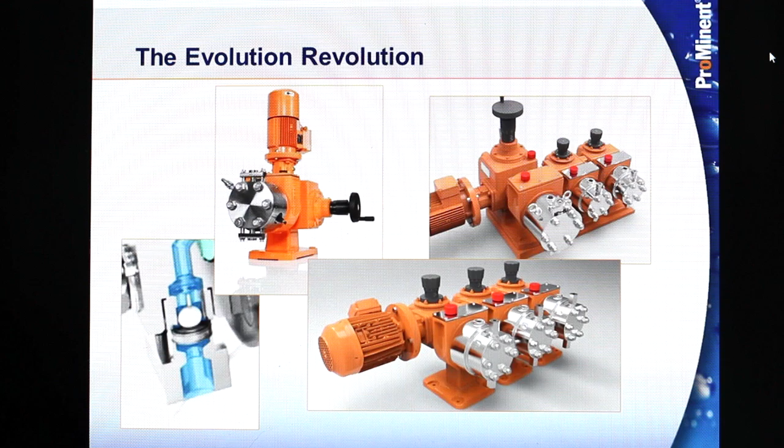So what is the Evolution Series pump? The Evolution Series pump is designed around the API 675 specification. API 675 is specific to chemical metering pumps, or positive displacement chemical dosing pumps. It is the American Petroleum Institute standard that everybody tends to build their pumps to. So it meets a high level of industrial standard.

It is one of those specifications that a lot of manufacturers will take some general basic exceptions to, but for the most part, you've got a general guideline as to how you need to design that pump. We are compliant with the Evolution pump to the third edition, the most recent edition of API 675.

It is a hydraulically actuated diaphragm pump, meaning that it has hydraulics driving the diaphragm, and consequently that pump can do extremely high pressures. It's capable of up to 5,800 psi, as you can see below. So it's capable of very high-end process type projects and applications.

It is a non-lost motion drive, which means it is a design that meets certain applications and certain standard specs for various clients, lends itself to the higher flow applications, becomes a very robust drive. These drives are not always the least expensive in the world. You won't find it in the very small pumps usually, but you'll see it in the higher end pumps where you need a much higher flow, much higher pressure applications.

The Evolution was designed to run in flow ranges starting at about 1 gallon an hour and up to 1,800 gallons an hour. It's able to do that through 4 frame sizes. Depending on the application, we can tailor in an application of a single pump selection if we need to. Again, those pressures on those applications will go up to 5,800 psi in some of the lower flow applications for some of these services.

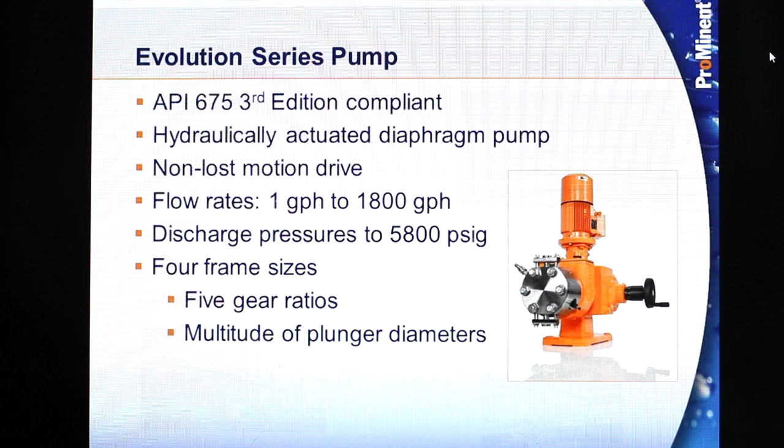The Evolution pump was designed to go after a broad spectrum of markets. Normally when we talk about API 675 pumps, American Petroleum Institute, we're thinking about chemical and petrochemical, hydrocarbon processing, the higher end process applications, which is exactly what this pump is designed for.

What a lot of folks don't think about right off the top is other services where this pump's going to fit in. The power industry, for example. The United States is currently on a process of replacing a lot of old coal-fired power plants, so there's a lot of new gas-fired plants being installed in the U.S. Because of that, there's a lot of new applications, and those chemical feed applications can be relatively high pressure. So the Evolution does fit into a lot of those services very well.

The oil and gas industry, even though it is not exactly doing the best right now because of low oil prices, the business is still there. We know from past experience that the oil industry always has a cyclic effect. It will come back up at some point in time, and with this product, you'll actually have a piece of equipment that will fit it very well, including offshore applications for those customers that are in the Gulf Coast, or anybody dealing with an engineering firm that might be doing a project overseas for an offshore application.

The ones that don't always come to mind are the water and wastewater treatment applications. Even municipal type plants periodically will specify a hydraulically actuated diaphragm pump. They don't need it for the pressure, usually. Most of those plants are 150 pounds discharge pressure at the most. But they have an engineer that has specified a product that says it needs to be a hydraulically actuated diaphragm pump. The Evolution fits those services very well.

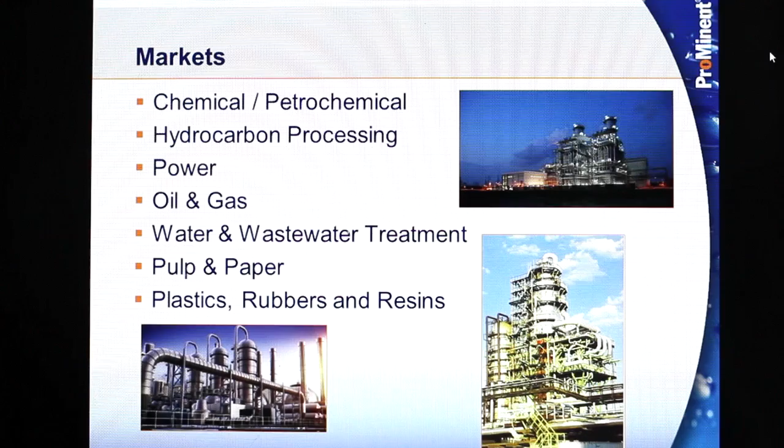Reviewing some of those design advantages that the Evolution has, the high pressure is one of those things that comes to mind immediately. One of our bigger competitors that has probably the largest population of chemical feed pumps in this range out in the world tops out at about 3,500 pounds. So you've got immediately a product that actually can do higher pressure applications where they would have to step up into a much more expensive, much more complex drive mechanism to hit those high pressures. You're in a standard product, so you've got an ability to fit into those services much easier.

It uses the variable eccentric drive, a non-lost motion drive. It's a little bit more complex in the way it operates, but the net result is you get a very robust drive. These drives tend to run 15, 20 years without any maintenance other than changing oil. So they're very long life, they're very robust designs. They will give a very reliable product to most customers.

One of the features the Evolution has is it is always a double diaphragm with leak detection. That advantage sets you apart from some of the competition where they throw that in as an adder that may be anywhere from $1,800 to $2,400 depending on the competition, to put that into their pumps, where we have it as a standard option.

The leak detection option in the Evolution pump is done either via gauge, which is our standard offering, or you can add a pressure switch, either rated for regular environment or explosion-proof environment. So you've got a few options in there, and we can even upgrade that if a client has a very particular requirement for leak detection, if they want a special transmitter or something like that.

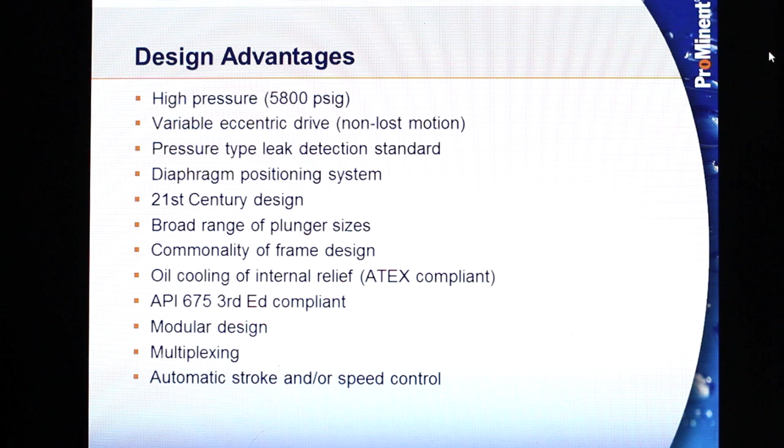I'm going to show you a couple quick videos. These will hopefully come through fairly clearly on the webinar. If they do not, these videos are actually available through the ProMinent website, or you can contact me and I can get you copies of these as well. They are currently shown using metric units in some cases, however we are working on an update that will show everything in US units. I'll do a little on-the-fly conversion for you guys so you can see how these pumps fit into some of the things you're looking at.

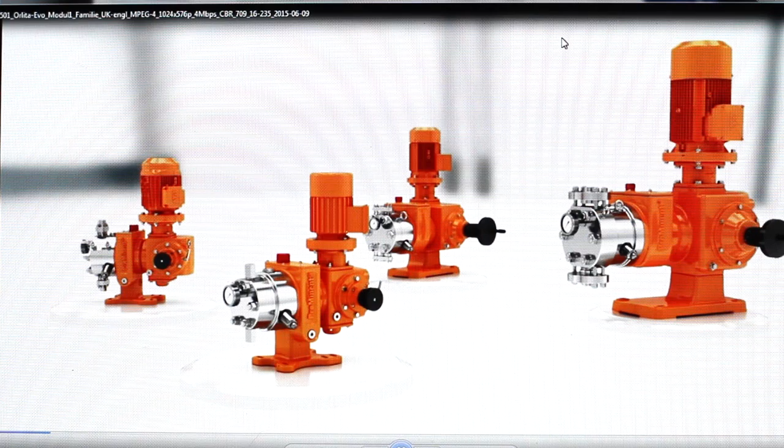First off, we'll start with the Evolution pump family. So you see there are 4 frame sizes that we're looking at. Obviously, they all look very similar in the way that they're configured. The Evolution 1 starts out at 400 bar, or 5,800 PSI, and goes up to about 40 gallons an hour, which is 160 liters per hour. The Evolution 2 goes up to 380 liters an hour, equivalent to about 100 gallons an hour.

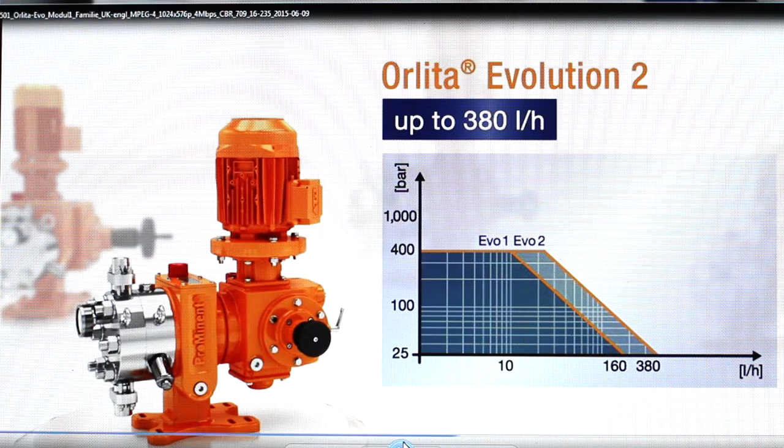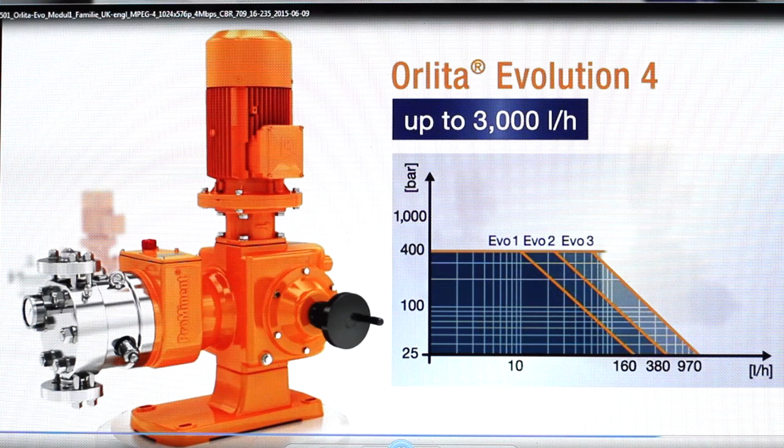The Evolution 3, again at 5,800 PSI, flows out to 970 liters per hour, about 250 gallons an hour. And the Evolution 4, published here with a high flow rate of about 3,000 liters per hour. As I mentioned earlier in the presentation, there's about an 1,800 gallon an hour max. This pump can actually get that flow, it's just a little bit lower in pressure. 3,000 liters an hour is 790 gallons an hour, but it will go up to about 1,800 on a couple other models. But you'll see just in those 4 frames, you cover a broad spectrum in basically the same design.

Some of the design features.

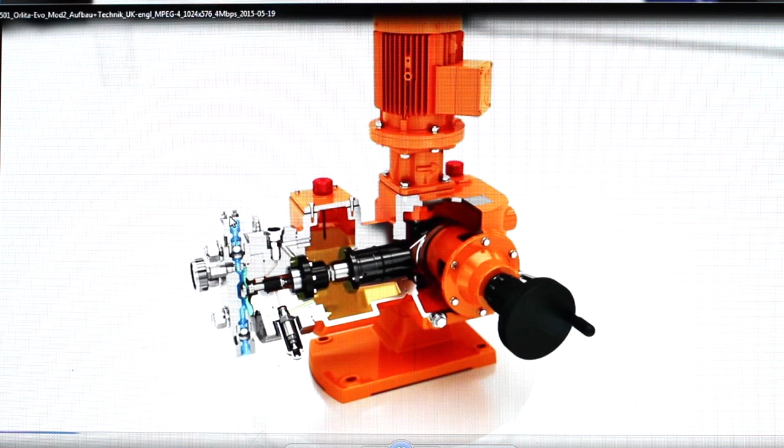So the first off is the variable eccentric. This allows the pump to adjust its stroke length without any major pulsation spikes. It's a very heavy-duty design, relatively simple to work with.

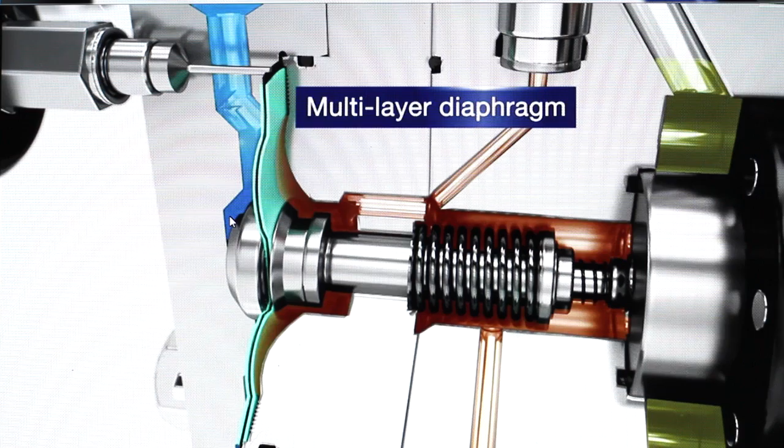Double diaphragm pump, automatic in every one of our models. It's not set as an option, it's actually a standard. The diaphragm position control helps make sure the diaphragm stays in a safe condition.

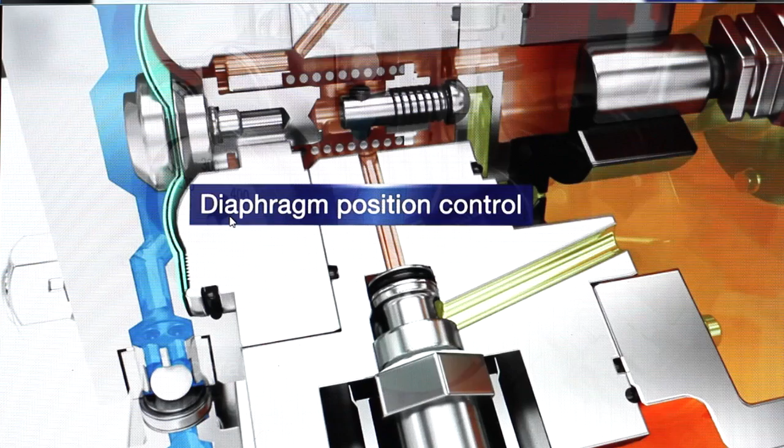Overpressure protection, and then leakage compensation for any hydraulic oil lost past the plunger or through the air bleed valve. Of course, air bleed for the hydraulics. When you deal with a hydraulic system, you have to be able to bleed air off of that system. All of these are integrated into the pump.

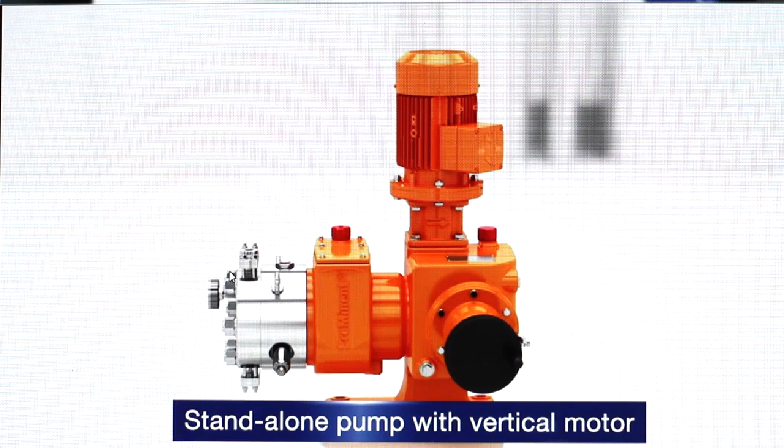And then the flexibility. The advantage of the way the Evolution was designed is you've got a lot of flexibility for being able to do different things with this pump. So if you want to multiplex it, you move the motor to the side, and then you can add additional drive cases. And these can be different size drive cases as well. You can put a 4 with a 2, or a 4 with a 1. So you've got a lot of flexibility on those.

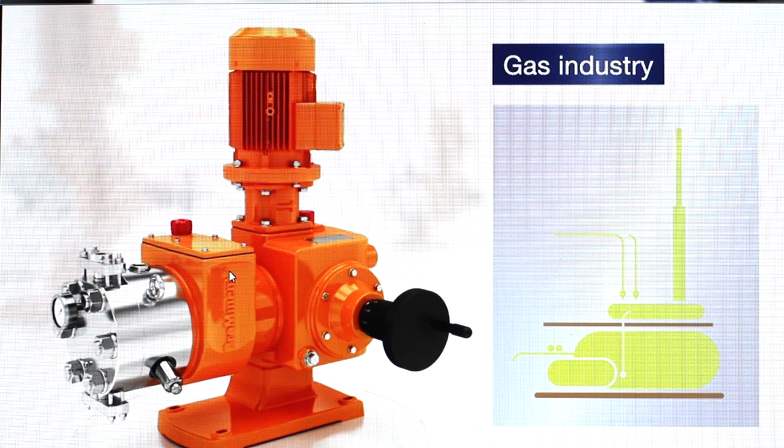But it's basically been tailored to the different markets that you're going to run into. Of course, the oil industry, gas operations, gas industries, chemical industry, and those other markets that we spoke about earlier.

So again, we're talking about a standardized product as opposed to the current Orlita product line, which is a much more engineered product for individual applications. This is a much more standard, modular design. This will be manufactured in the USA. That's actually one of the biggest advantages that we're bringing to the table.

We're working on the plans for that now. The idea is we want to have that better delivery. We have to build that in the United States, and that's what we're working on now. It's one of the projects that I'm in the middle of right now.

It is a technically superior pump. It is much more modern technology. It's adding a lot more features to it without a lot more complexity to the pump. It gives you a lot more advantages. And ultimately, market competitive — it's going to be price competitive against all of those known players in the market today.